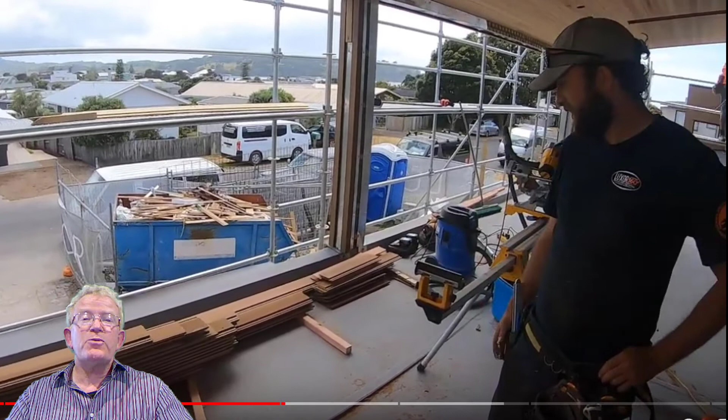Now, most builders are looking for ways to make more money and be more efficient on building sites. Prior to Christmas, Eddie Cooney showed us one of his building sites, and he talked to us about the methodology he uses to be more efficient in the handling of cedar and the installation of cedar cladding. And this raised some issues, particularly around how do we calculate the hours required and what sort of savings and

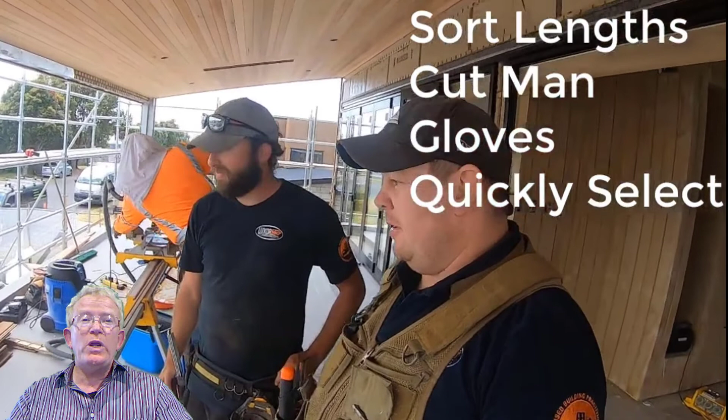efficiency can Eddie achieve. So what I want to do in this video is show you how you can make a lot more money by looking at things the way Eddie Cooney does. In other words, more efficiently, questioning your current procedures and processes and finding better ways to do things. So let's get stuck in and see if we can save you tens of thousands of dollars in how you install your cedar.

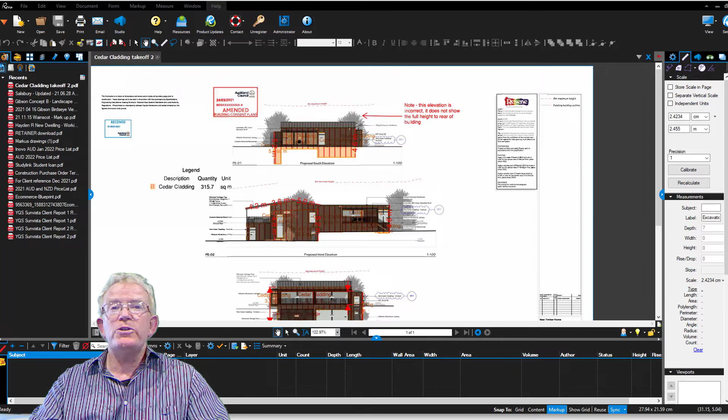So the first thing I need to do is lay a foundation of understanding so that we're comparing apples with apples and you know the figures involved. The first thing you see here is a part of the takeoff that Eddie did. He used Bluebeam Software, and you can see that he's come up with a net cedar area of 315.7 metres squared.

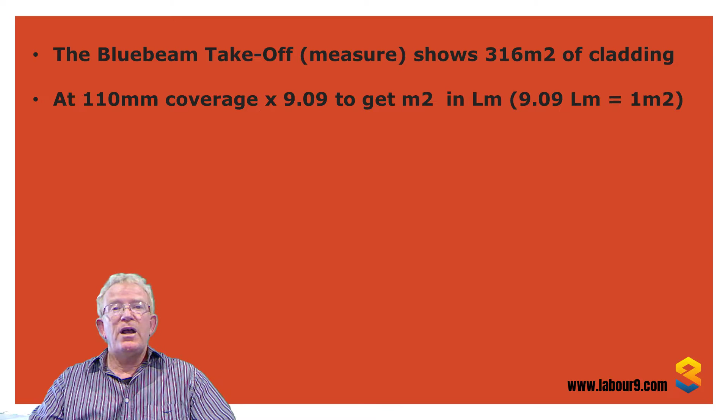So what we've established is there's 316 metres squared of cedar cladding, and what you need to consider is the coverage. In this case, he's using 135 wide by 18 thick boards, and that gives us an effective coverage of 110 millimetres. So if you divide that into a metre squared, or 1,000, you'll find that it's 9.09. In other words, there's 9.09 linear metres of cedar per metre squared of coverage.

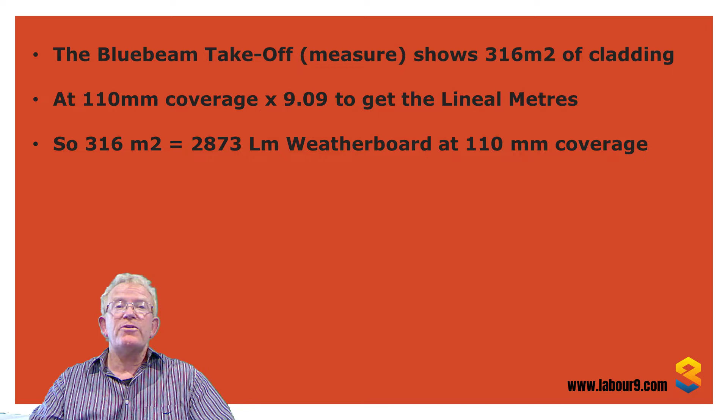So if we multiply that out, we find that the 316 metres squared equates to 2,873 linear metres of weatherboard. We also want to account for wastage. So we're going to use 15%, and the main reason we're using 15% is because Eddie is considering the amount of arrow grain that might appear, and he doesn't want that arrow grain to show in the cladding.

We know we need 2,873 linear metres of cedar. If we multiply it by the 15% wastage factor, we end up with an order quantity of 3,303 linear metres. Let's just round that to 3,300 linear metres of cedar to order. Now we need to consider how much of that are we going to fit. The net quantity we're going to fit is 2,873, but we're going to handle 3,300.

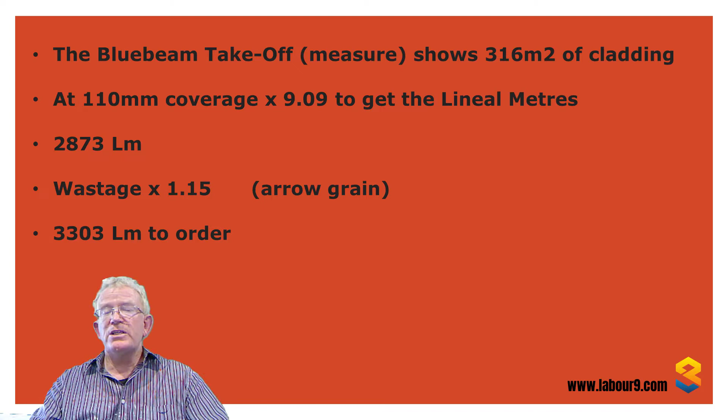So I'm just going to take a rounded figure of 3,000 linear metres to fix as a labour calculator. So the two key figures I want you to remember is that we've got 330 metres squared to cover, and that equates to roughly 3,000 linear metres of cedar weatherboard.

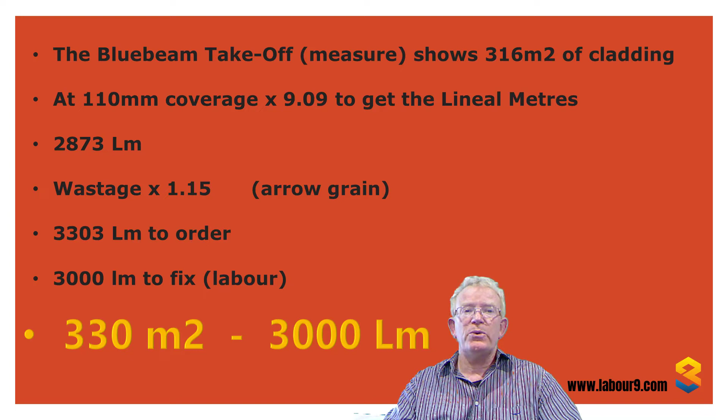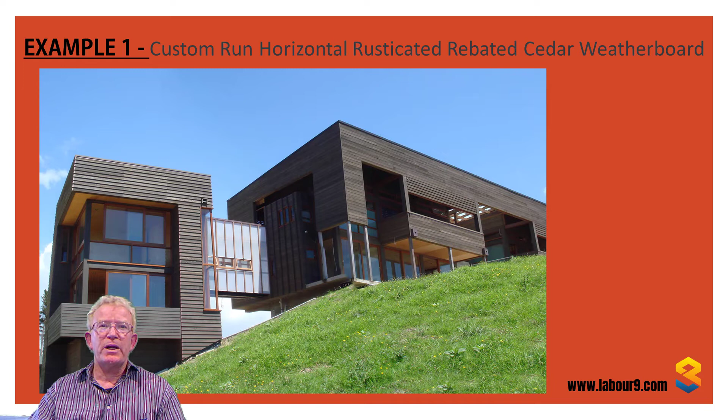Let's now do the mathematics to make our comparison. Remember, we're doing this custom run, horizontal rusticated and rebated cedar weatherboard. So we know we've got 330 metres squared, and that if we use a normal crew, it's 986.7 hours of labour to fit that cedar. In Eddie's case, it was 702.9 hours. So the 986 minus 702 gives us a difference of 283 man hours.

So what are those man hours worth? Well, at $70 an hour, that comes to close to $20,000 excluding GST, or including GST, $22,846. Quite a marked difference. Can you now see the benefits of listening to what Eddie has to say about site efficiency and the handling of materials? Let's go to example number 2.

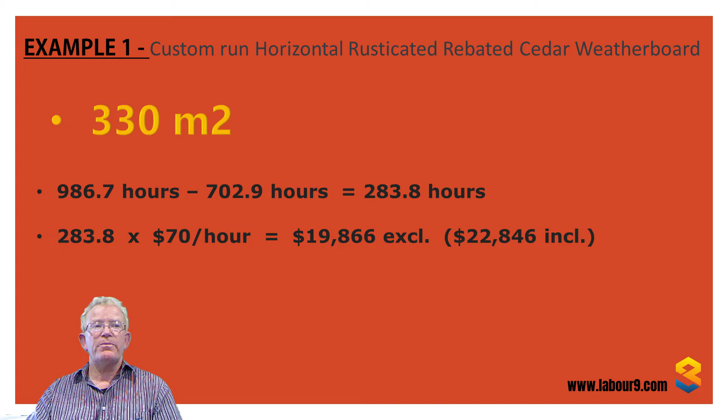In example number 2, we're looking at board and batten cedar. So how does that compare between Eddie's method and your average builder? Well, here's our board and batten cedar. Put in our figure of 330. We do our search for our board and batten cedar. Drill down, find the labour constants. So your average builder would take 1,471 hours, but Eddie's crew would take 917 hours.

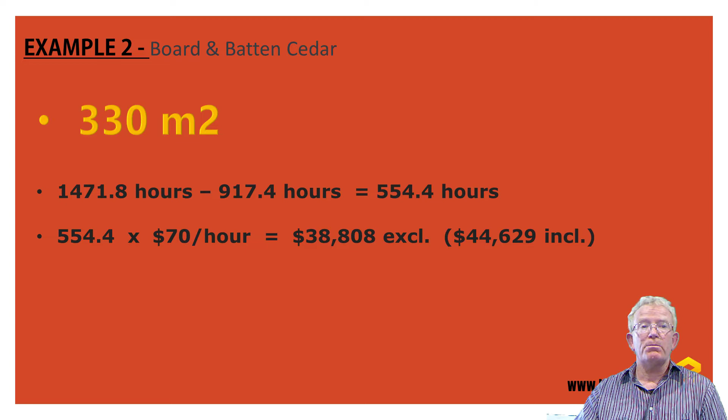We have 330 metres squared. If we take your average builder at 1,471 hours, and we compare them to the 917 that Eddie's crew would take, that's a difference, quite a large one in this case, of 554 hours. In dollar terms, that 554 hours equates to nearly $39,000, or $44,000 if you include GST. Again, a very marked difference that you could profit from. We'll move on now and do example number 3.

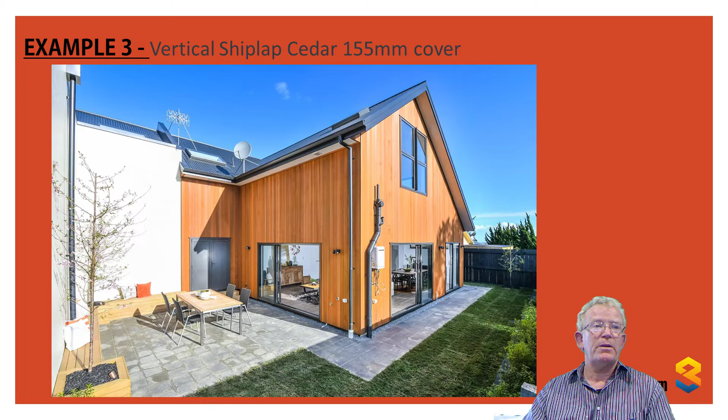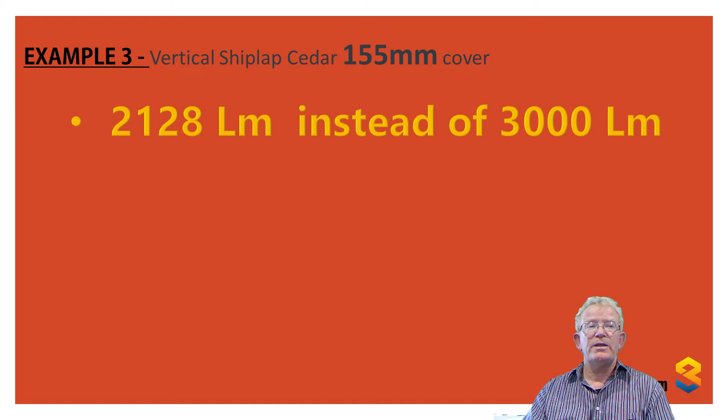In example number 3, we're looking at vertical shiplap cedar with 155 millimetres of coverage. Now there's a slight difference in our calculation here. Because it's 155 millimetres of coverage, we don't need as many lineal metres of cedar. In fact, we can reduce this from 3,000 linear metres to 2,128 linear metres. So let's go into Labour 9 and do the comparison.

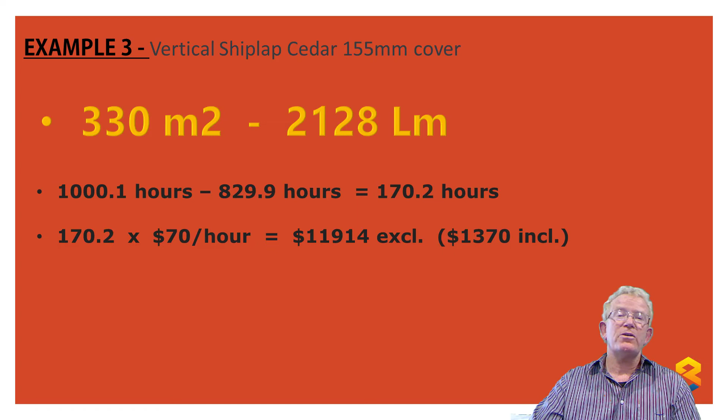So we can see here that an ordinary builder would take 1,000 hours to install that vertical shiplap, but Eddie's method is a lot more efficient and he can do it in 829 hours. Let's now make our comparison. Because it's 155 millimetre coverage, we're installing 2,128 linear metres of cedar. And an ordinary builder would do it in 1,000 hours, and Eddie's crew can do it in 829 hours, so there's 170 hours of difference. So if we multiply that by the $70 an hour, Eddie's crew is nearly $12,000 cheaper, or $13,000 including GST. Let's now move on to our last example.

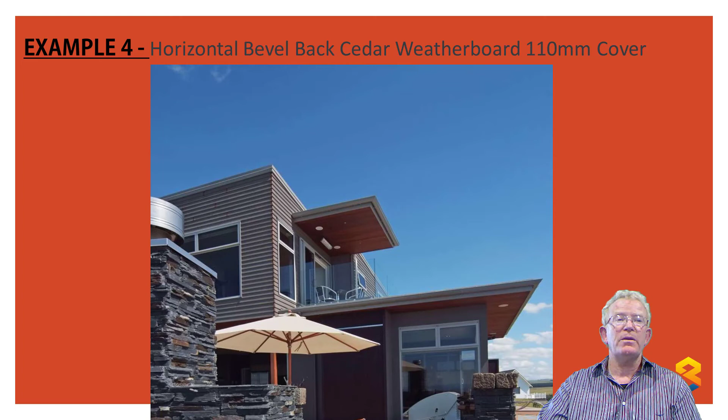So here we have horizontal bevel back cedar. The weatherboard coverage here is 110 millimetres, and we know that we're going to have to install 3,000 linear metres. So in Labour 9, we look up the labour constant. Here we have a labour constant with 3,000 linear metres.

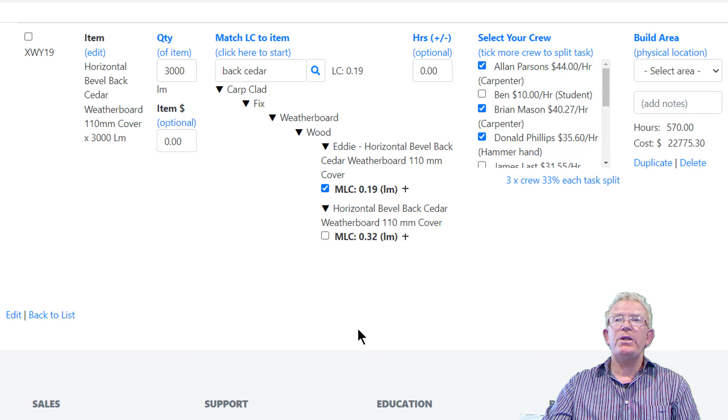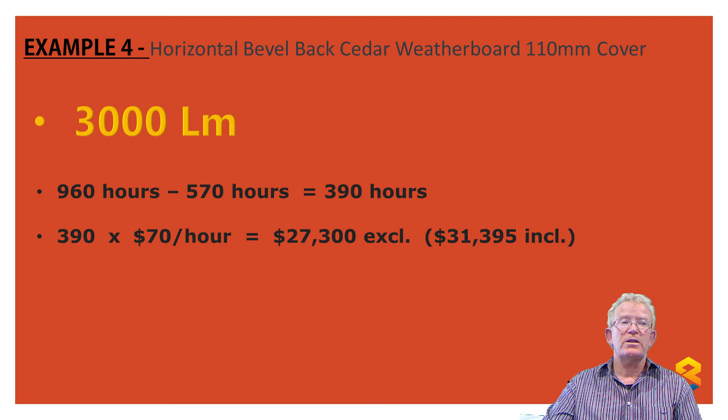You can see over here it's 960 hours, and it's going to cost $38,000, but Eddie's crew would take 570 hours at $22,000. So once again, comparing our figures. So you can see we've got a difference of 390 hours. And Eddie's crew could do it for roughly a $27,000 difference, or including GST, $31,000. Quite substantial.

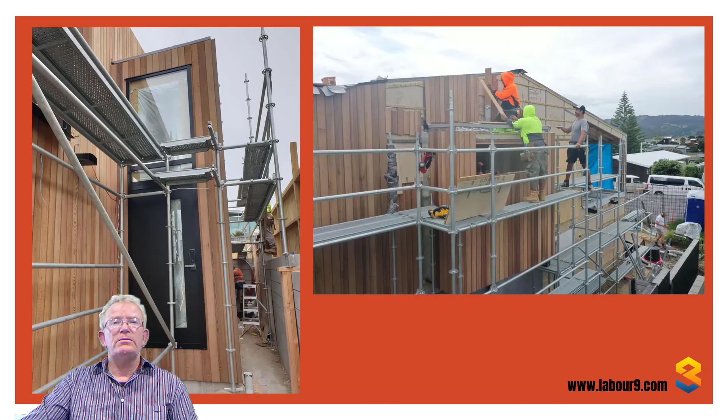We can summarize from all of this information that it may pay to scrutinize what you do and how you do it. That it may pay for you to consider using better tools for calculating these things, like Labour9, and engaging with the likes of Eddie Kearney and myself to understand better methods so that you can reduce your production times and therefore improve the profitability and also your saleability to your clients.